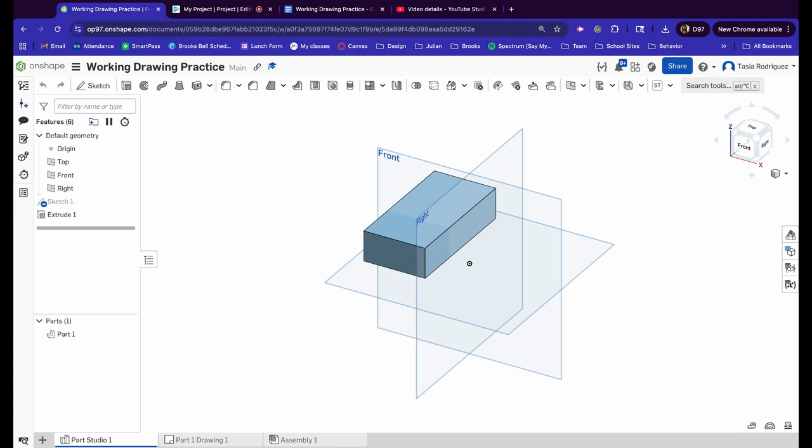All right, now I am going to make the other shape, which is a cube with a chamfer. So on the bottom, I'm going to say Insert New Tab, Create Part Studio. I am going to sketch on the top plane and normalize. So I am working on this shape right here, cube with a chamfer.

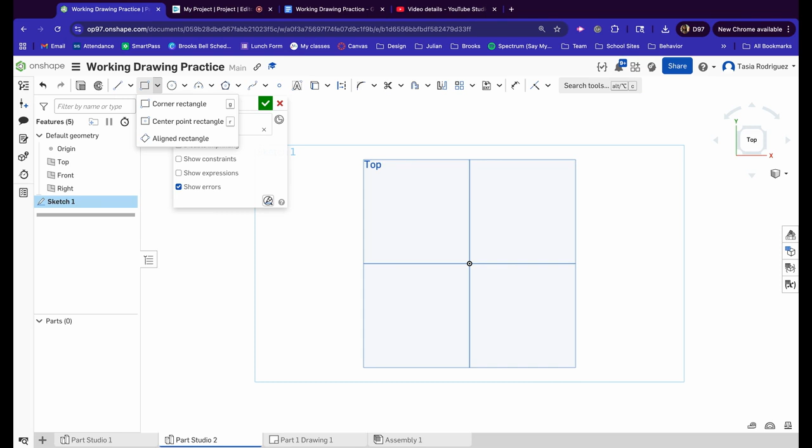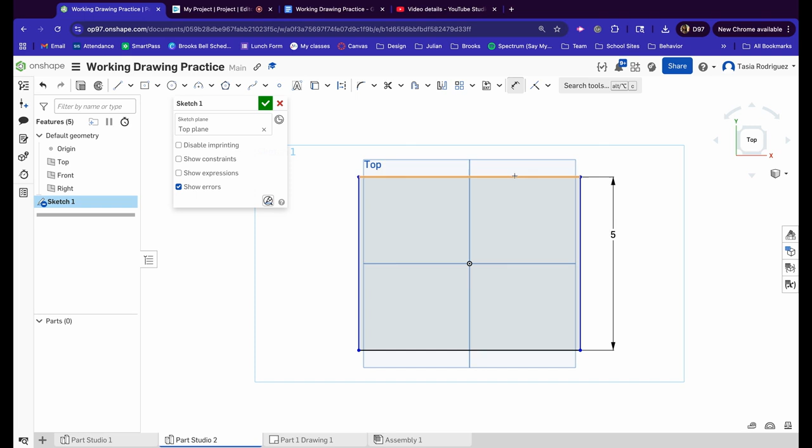I am going to add, it doesn't particularly matter which square or rectangle you use. I personally like center point rectangle, so I'm just going to do a center point rectangle. Looking at the dimensions, this is a perfect cube, so it's 5 inches tall, 5 inches wide, 5 inches as the depth. So dimension tool, 5, 5,

check mark. Looking at this isometrically, I am now going to extrude it. And as I said, it's a perfect cube, so this was also 5 inches. And that number is from here, right here, 5 inches. Check mark. Now this cube is not finished because on here we have a chamfer. So it's 0.5 by 45 degrees.

I'm in my 3D tools. Chamfer is right up there. Now I'm going to select all 4 sides. And if it starts off with equal distance, I'm going to say distance and angle. I'm going to type in 0.5. 0.5, that's what it says right there. And then the degrees is 45. So that's why I have the distance is 0.5, degrees is 45.

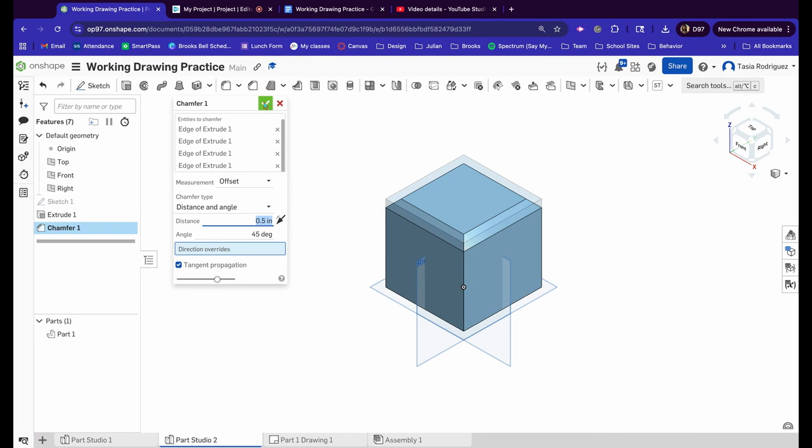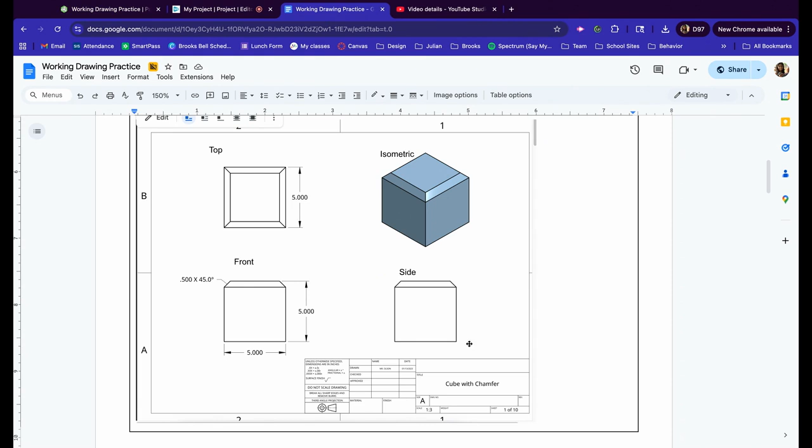And I'm not touching the sides of it. Remember, I'm touching the top. So if I do this again, I go to chamfer. Make sure I'm going to move it to where it says distance and angle. I'm going to type in 0.5 and 45. And then I'm going to click on the edges, all 4 of the top edges. And it's only the top edges, because if I look at my working drawing, it's not on the bottom, it's not on the sides, it's only on the top.

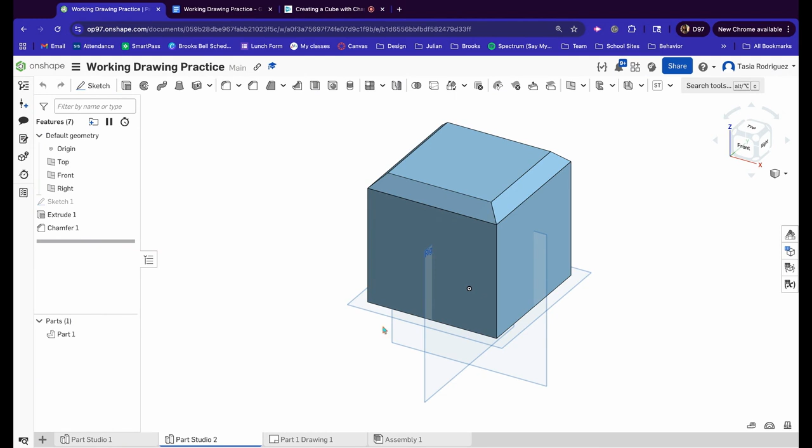All right, now we're going to make the working drawing from our cube. So where it says part 1, right click, create drawing of part 1, go to 4 views, leave everything else alone. Okay. It's going to take some time. If it takes too long of a time, I suggest you exit out and go back in.

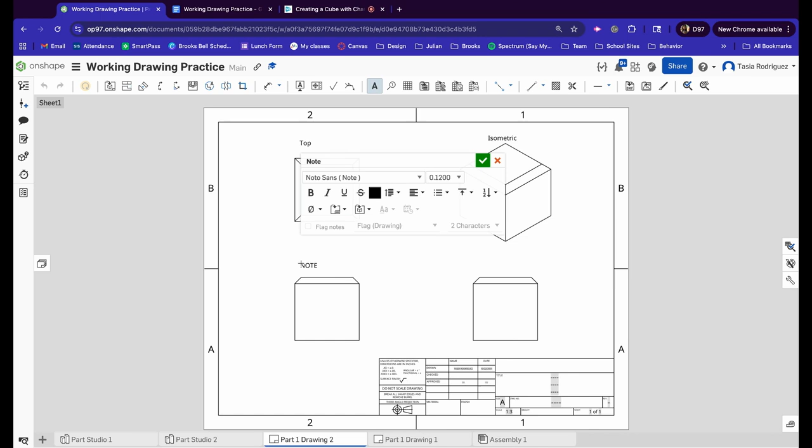And I am going to start off with my note, top, isometric, front, side. Get off of my note by pressing escape or the A. I am going to shade in my isometric view by pressing right click, show hide, show shaded view.

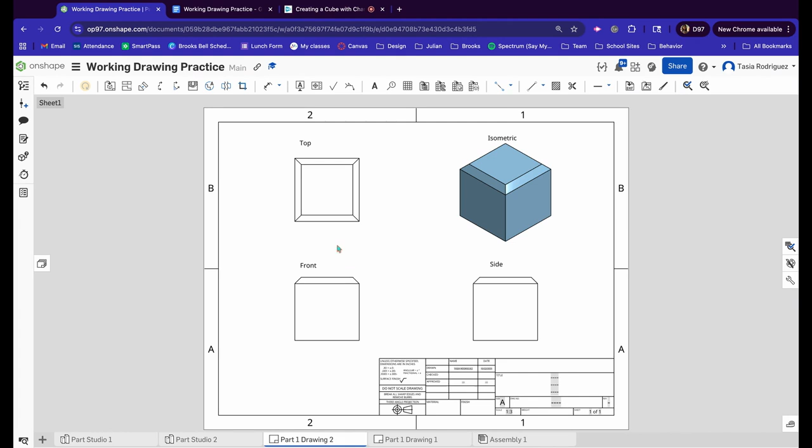If I have my part as, let's say I have it, I don't know, red, and I go back to my working drawing, there's this little button that appears up here. You can update it and it'll change it. That's what it means by showing the shaded view.

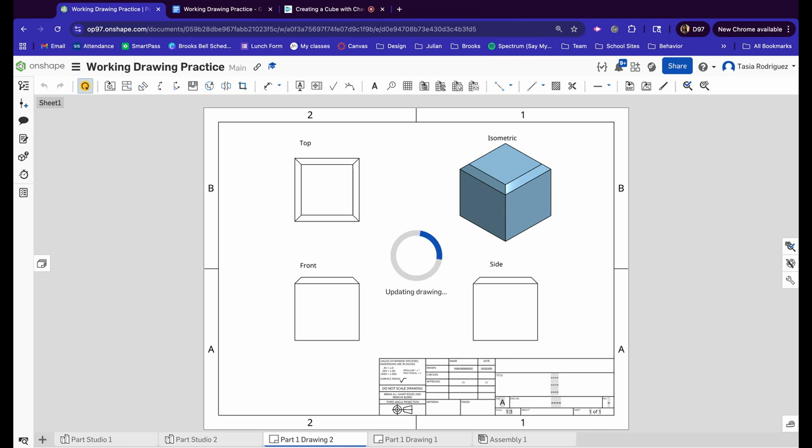All right, I'm in a dimension. So the same dimensions on my paper. Here's this one. I am going to do here. And if I were to just do the line, the height of the cube, it'll give me 4.5. And why that is because I used that chamfer.

Chamfer was 0.5. And if I notice here, it is actually giving me the distance from this line to this line. I don't want that. I want the top of the cube to the bottom of the cube. So I am going to get off my dimension tool and delete that one. And click on the top of the cube, bottom of the cube, and now it gives me 5.

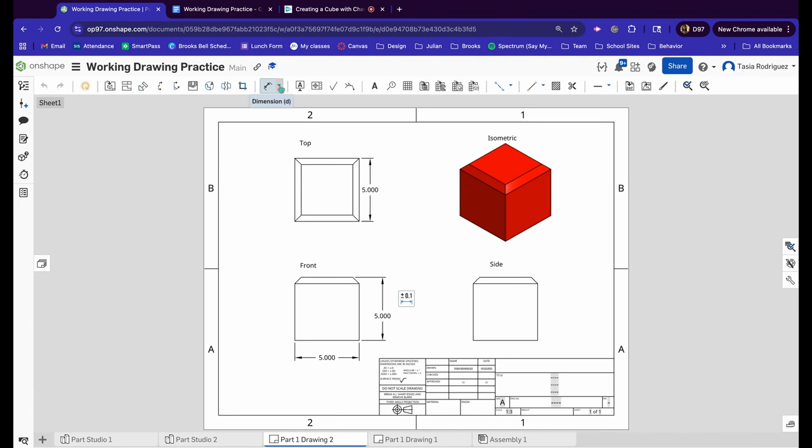Now to get the chamfer dimension, I'm in the dimension tools. I click on the little down arrow, and there's chamfer dimension. I am going to click on the side because it gave me the length, the distance, and angle. So I need to have two lines for an angle. And there's the 0.5 by 45 degrees.